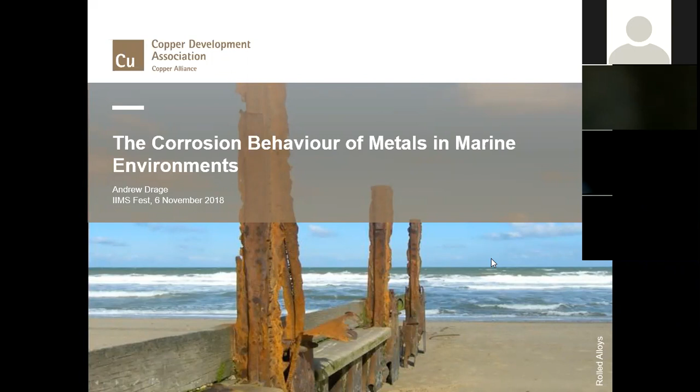It will cover many materials and corrosion properties that will hopefully be beneficial to you all. So, the corrosion behaviour of metals in seawater: marine corrosion, seawater corrosion, is down to a complex combination of properties and conditions, with different groups of materials performing in different ways dependent on circumstances and environment.

Understanding the differences in seawater itself is a good starting point, as seawater is not just a body of water containing salt. It's a complex mixture, a living body that can change at different locations. It contains different salts, dissolved gases, trace elements, suspended solids, and decomposed organic matter, together with living organisms, both large and small. Sometimes it's more the small ones that cause us an issue in terms of corrosion.

Critically, the sea actually moves with great force, and the current or flow of the seawater can change dramatically, and this can have a large effect on corrosion. It's not limited to natural movement and swells, and can also include the flow of water over the hull of a boat or a propeller, or even the flow of water inside a pipe or tube.

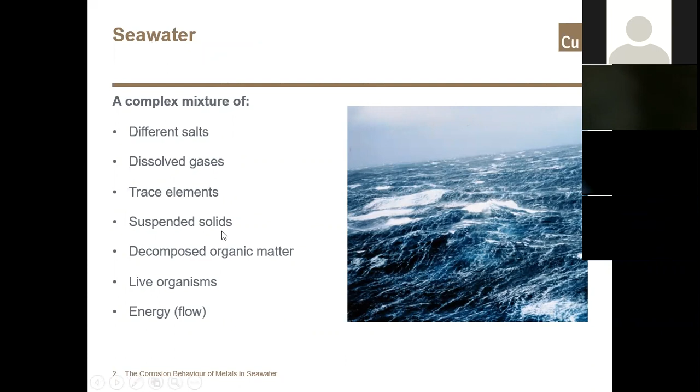Corrosion itself can be influenced by many factors within the seawater. The oxygen content can be hugely important to certain metals and alloys, as many of the metals will form oxide films on the exterior of the surface to provide superior corrosion resistance. The oxygen can be affected by water depth, seawater velocity, pollution, and marine organisms.

The flow rate of the water itself - how fast does it flow? Is it stagnant? Stagnant and polluted waters will have less oxygen content. So can you see any effect? This could be a combination of factors.

The salt content in the water can widely vary between locations. For example, dissolved salt in the Baltic Sea is only around 7 grams per kilo, whereas salt content in the Persian Gulf is 43 grams per kilo. So there's obviously a huge variation between locations.

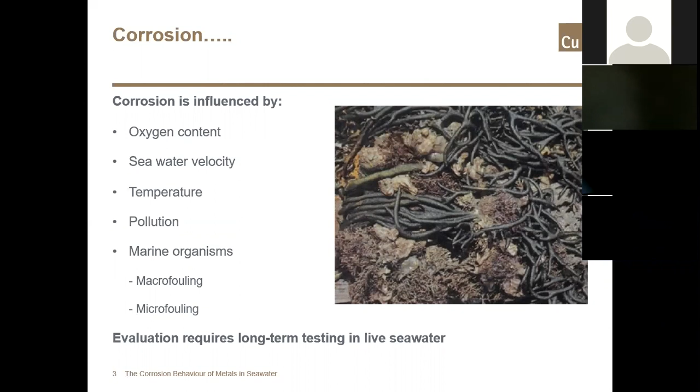This brief overview will describe the relative corrosion resistances of several different alloy groups used in seawater systems, with the main properties being covered being resistance to flow, resistance to velocity, localized corrosion, stress corrosion cracking, galvanic behaviour, and marine organism attachment. We'll touch on these again later, but these are the main mechanisms of corrosion that need to be considered. Some alloys are more susceptible to one form of corrosion than others, but they need to be taken into consideration as a whole.

If not, it may be the case that you inadvertently have a failure, because marine structures and engineering components are generally made up of more than one material. So we have to take into account each and every corrosion mechanism, and we'll briefly touch on each one as we go through the presentation.

So where do we start? Basically, we'll start by going through some of the alloy groups, and we'll start with carbon steel and cast irons, as these are probably the most commonly used structural and engineering grades within marine environments.

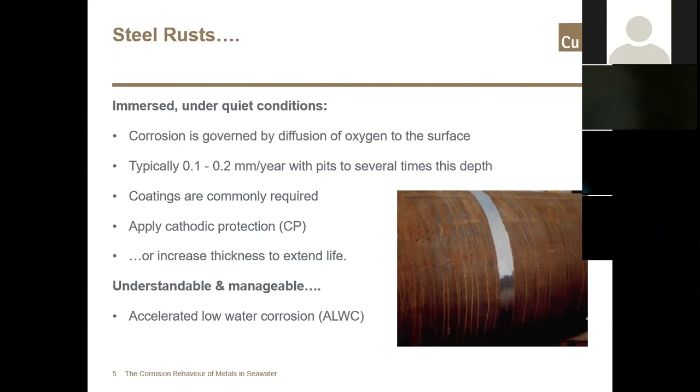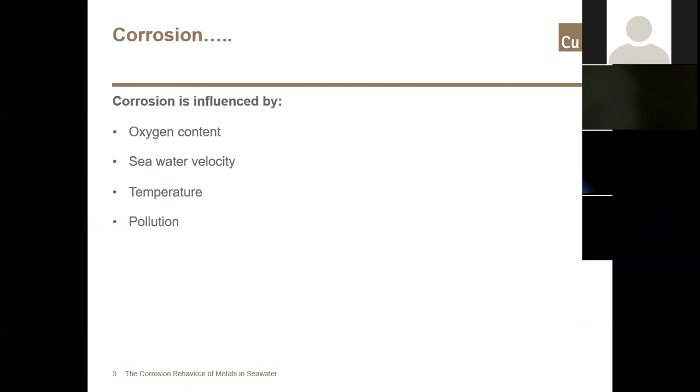The next group of alloys would be the cast irons. Now, the cast irons have a similar corrosion rate to steel when talking about grey cast irons and spheroidal graphite irons.

The traditional cast irons have a graphite flake that sits in an iron matrix, and while the graphite is a more noble material and doesn't corrode in seawater, the iron matrix is very susceptible to corrosion. So the iron can be corroded, leaving behind a deposit of graphite and silica and iron corrosion products. This is a phenomenon known as graphitization.

Generally, this type of corrosion is favoured by hot conditions and is often found in water boxes and valves in seawater systems. At first glance, the surface may appear reasonably normal, just covered in rust, but underneath is a rather flaky, crumbly structure with a serious loss of material.

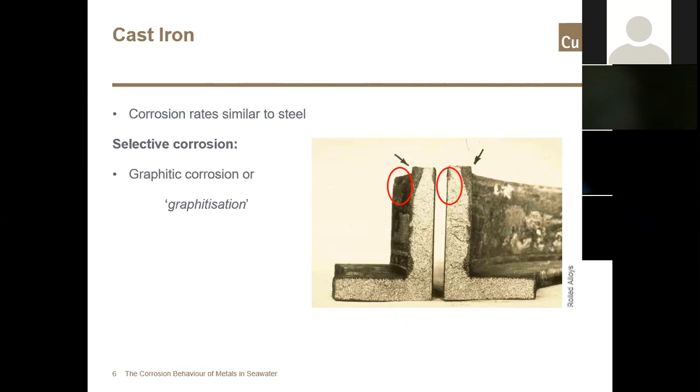They may have higher maintenance and replacement costs associated with them, but not if successful protective measures are used, such as cathodic protection or a coating. So they do have a place in marine environments due to the economics, and as mentioned in the steel section, if it's over-engineered, there can be no issue even if there is some corrosion on the surface.

Just to go on from the selective phase attack from the cast iron side of things, it's not a phenomenon limited to cast irons. On screen you can see a valve stem made from 60-40 brass that has shown signs of dezincification. The material was specified incorrectly and has failed in operation, due to the zinc phase corroding preferentially, as it wasn't as noble as the copper.

However, if you were selecting a copper alloy for seawater use, a corrosion or dezincification inhibitor would be selected, or again we could look at galvanic corrosion and make allowances that way.

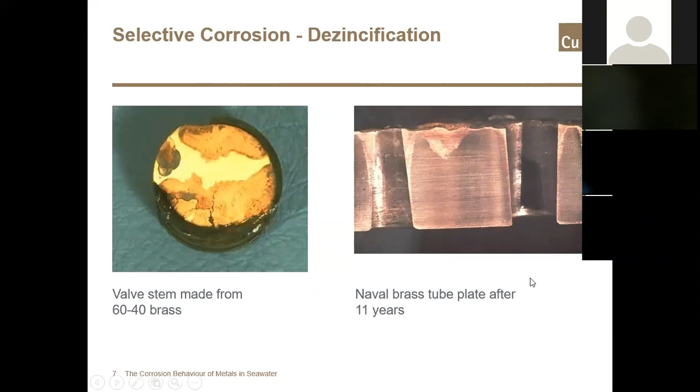The image on the right shows a naval brass tube plate that's been in service for 11 years. This was specifically over-engineered, and you can see actual corrosion on the surface of the material, but because it was over-engineered there's been no problem with that particular component, and it was designed correctly. So it's just understanding the corrosion method that could occur, and making sure we select materials correctly and proper design procedures to allow for corrosion over time.

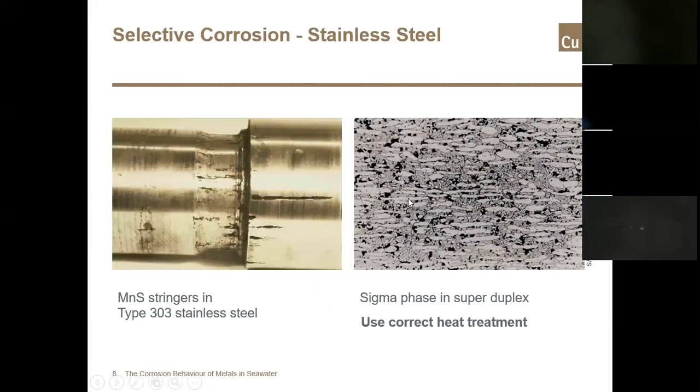Going back to the cast irons, there have been a number of developments over the past 70 or 80 years, with other cast irons coming into effect where additions of more noble elements have been made. For example, an alloy known as Ni-resist has additions of 15 to 25% nickel and small additions of chromium and silicon. As the nickel content increases, the iron becomes more austenitic, hence the name austenitic cast irons, and it actually reduces the corrosion rates compared to traditional grey cast irons or spheroidal cast irons.

In fact, corrosion rates can be as low as 0.02 millimeters per year on this particular alloy, but again the corrosion rates do increase with the flow rate and velocity of the seawater. And the alloys are often utilised more for larger workhorse jobs.

They utilise the strengths. They're typically used for pumps and pump casings, and they can be used in copper and ferrous seawater systems reasonably satisfactorily. However, they can be susceptible to stress corrosion cracking as well. So whilst there are some improvements, there are other issues that again need to be taken into account during the material selection and design process.

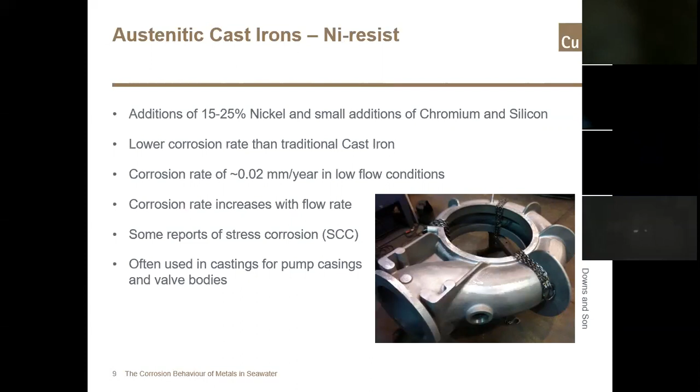So we lead ourselves onto stainless steels, and these were developed around 90 years ago, and they were developed to offer better corrosion resistance to carbon steels and cast irons. A stainless, by definition, is an iron alloy with more than 10.5% chromium, and these obtain their corrosion resistance from the formation of a protective chromium oxide film that forms on exposure to air.

Where you can see the carbon steel on the left-hand side, when that is exposed to air, it begins to rust, and it gets a protective coating of rust that stabilizes the surface. Stainless steel gets a strong adhesive-like film on the surface that's approximately 2 to 3 nanometers thick, and this replenishes itself with oxygen if it is damaged. So it can repair itself, and in open seawater there's normally enough oxygen present to allow this film to repair and heal itself, protecting the underlying metal from any corrosion.

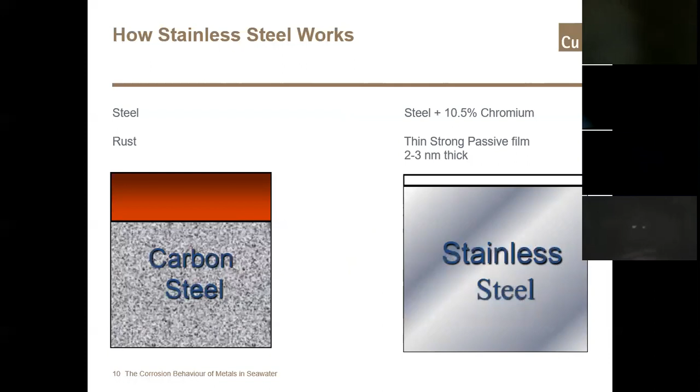Stainless steels generally rely on the movement of seawater across the surface to prevent deposits and marine growth from forming, and it discourages local pitting. If the water is flowing, generally a velocity of around 1 meter per second is needed to prevent any pitting corrosion in seawater.

The general corrosion rate of stainless steel is very low, around 0.002 millimeters per year. But this is achieved by ensuring that oxygen is available through the flow of seawater across the stainless steel surface, which helps maintain the protective film, and the material remains passive and immune from major material loss and corrosion.

The film is actually maintained at higher velocities above 1 meter per second, and can even go as high as around 40 meters per second, which, if you remember going back to cast irons and carbon steels, could show losses of 5 millimeters per year on that particular material. So it's a big step up, and a big improvement.

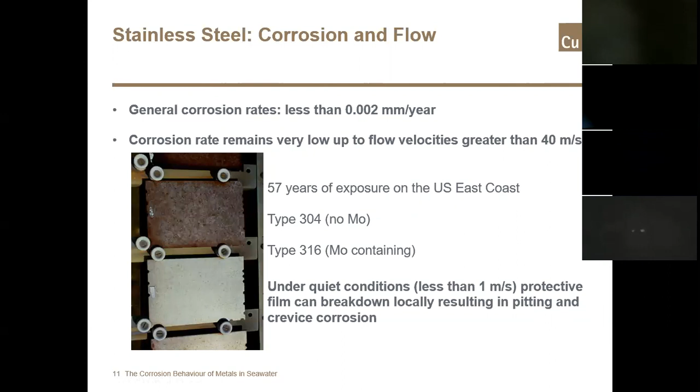Stainless can actually be susceptible to pitting, and it can be found in open or exposed areas of metal, possibly under microfouling, or it could be that chloride levels are too high, or there's overchlorination, surface contamination, or surface inclusions being exposed.

The problem of using stainless steels in seawater can often be the problem of pitting, and this can also be exposed by pitting attack under low velocity conditions, and in crevices and joins of material where the oxygen can't get to replace the protective film.

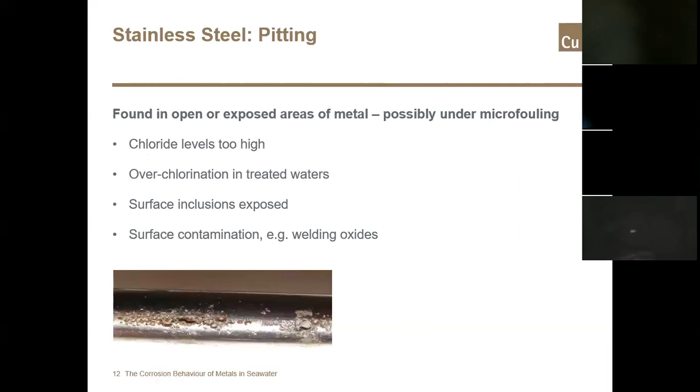Crevices or under-deposit corrosion can also be an issue where the oxygen becomes locally depleted. An electrochemical cell is created where the film may have broken down, exposing the metal below, which then becomes anodic compared to the adjacent material, and the steel will then corrode.

Crevice corrosion occurs more readily than pitting in seawater and at lower temperatures. So higher levels of the same alloying additions are used to improve resistance to crevice corrosion as well as pitting. Molybdenum, nickel and chromium all add to the corrosion resistance.

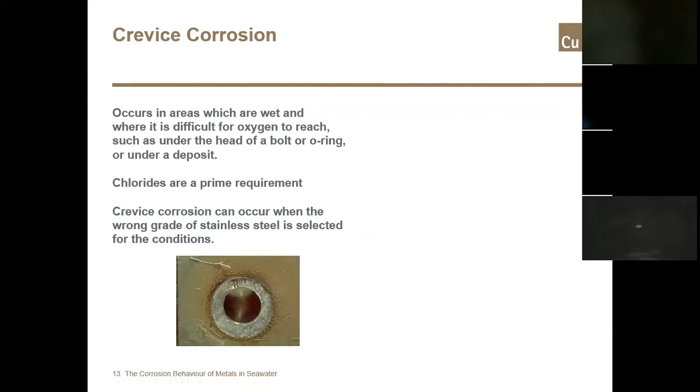You can see from the image on screen that it's an area that's been sealed by an O-ring or a nut in a confined area and suffered crevice corrosion. Or we have an image here where 316 has been used for a coupling, and where the O-ring is sat, there's been some crevice corrosion occur. This issue was cured by replacing the 316 with a 6% moly stainless steel, which then removed the tendency for crevice corrosion.

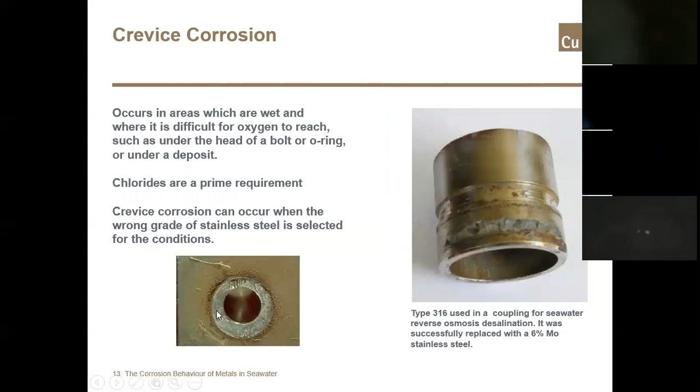Again, if we go back to the previous image, this is where the nut sat in the component, and you can see around the nut before it was removed that there is some rust. Then from that rust, when the nut is removed, you can see the crevice corrosion underneath the surface, and also on the parent material itself.

So we can look at removing the issue of crevice corrosion by using good practice. It's always good to design components avoiding threaded connections, avoiding sealing tight crevices with welds, and making full penetration pipe welds.

Alternatively, local improvements to crevice corrosion resistance can be achieved in areas such as flange faces by weld overlaying. This weld overlaying would be done with more resistant high nickel alloys that would offer better crevice corrosion resistance.

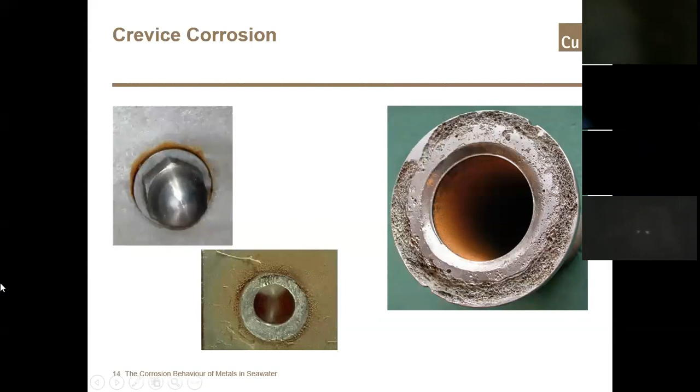The crevice corrosion and pitting resistance is generally ranked on how susceptible they are, and it's generally accepted now that a pitting resistance equivalent number greater than 40 is required for high resistance to localized corrosion in ambient temperature seawater.

Obviously the formula there is for the calculation of this. Alloys with a pitting resistance equivalent number of less than 40 often require cathodic protection still, and are sometimes galvanically protected by other metals within the system to stop any crevice corrosion and pitting occurring.

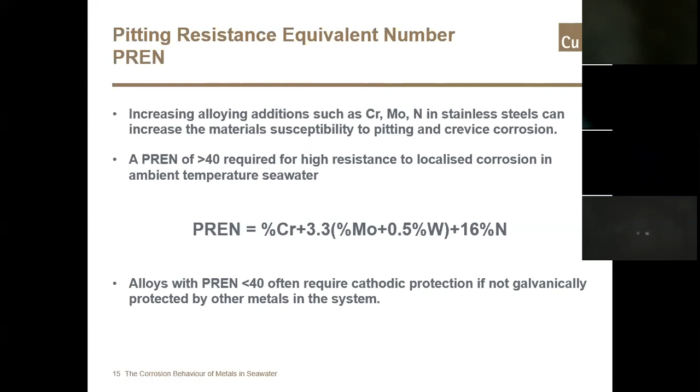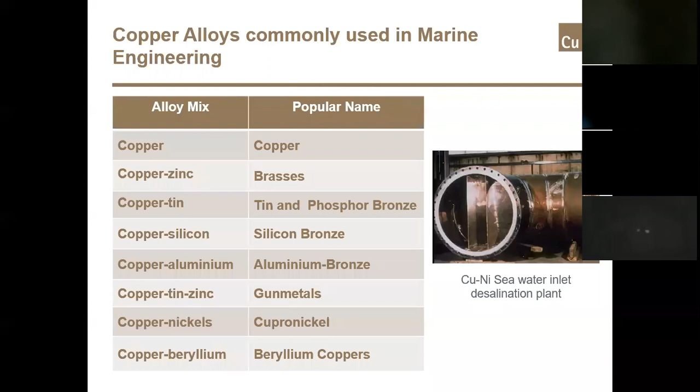So it brings me now to the copper alloys, which is obviously more at home to myself, something that we deal with on a daily basis. The most common coppers used in marine engineering are coppers, aluminium bronzes, and copper nickels. These have relatively simple additions to the copper matrix: copper zinc makes a brass, copper tin makes a phosphor bronze, copper aluminium makes an aluminium bronze, and a nickel addition makes a copper nickel. So they are reasonably straightforward, but there are a lot of different groups with different benefits.

We need to look at some of these in more detail. The benefits of copper alloys were recognised many years ago, back as far as the 17th century, when the benefits of copper sheathing were recognised on ship hulls, keeping them clean and enabling better manoeuvrability. Also gunmetals, i.e. tin bronzes, were used for cannon bodies on ships in olden times. The copper alloys have actually been developed massively since those early days, with many groups of materials and properties being developed. Again, this is a topic in itself, so I'll just touch the surface.

The development of copper-based alloys has allowed a wide range of properties to be met, with strength levels available up to 1500 MPa, hardness values up to 45 HRC. The copper alloys can more than match strength levels associated with ferrous materials, such as stainless steels, nickel alloys, and high strength steels. Copper as a whole offers low general corrosion rates in static seawater, approximately 0.02 millimeters per year, and has little tendency to pit.

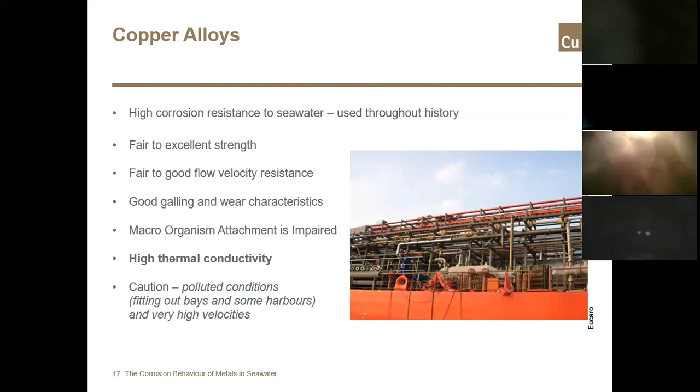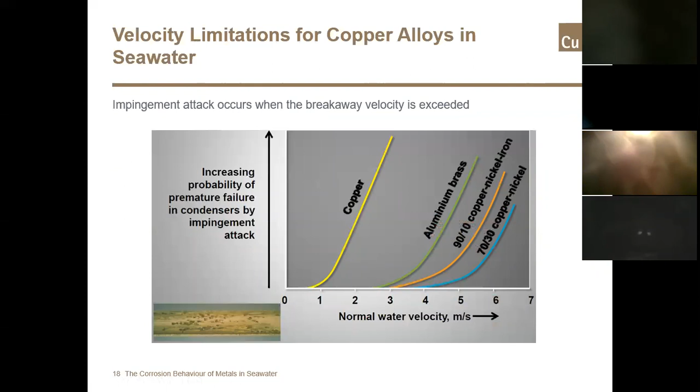As you can see from the graphic here, the flow rate does have an influence on which copper-based material should be selected, and whether that material is then subjected to impingement attack, and at what velocity. The typical materials for pipes and tubes are either aluminium brass or copper nickels, and as you can see here, there are recommended guidelines for maximum flow per second, but this is for continual use rather than intermittent use, so it can actually increase in certain instances. But we should avoid tight bends and localized obstructions, to avoid any turbulence and issues with crevice corrosion, etc.

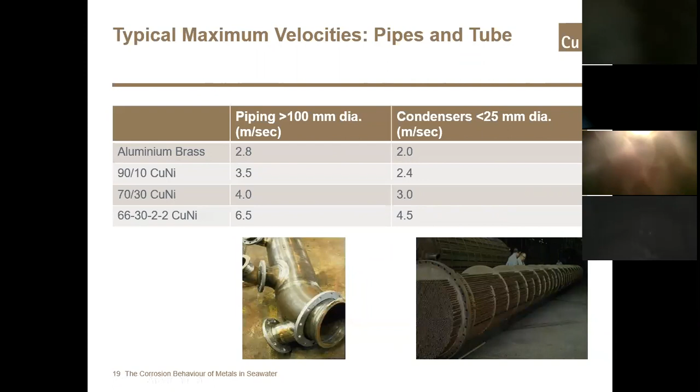So both the 90-10 and 70-30 cupro nickels are successfully used for various seawater pipe work, in seawater condensers, heat exchangers, and pipe work in naval vessels and merchant shipping. Other areas, like copper nickels, can be used in fire water systems, and as I say, intermittent use can allow for up to 10 to 15 meters per second in that particular application, and it can be successfully used.

For boat hulls, if you were sheathing a boat hull, then you can look at 12 to 19 meters per second. Or if you were looking for a nickel aluminium bronze, we could use this for a propeller, because they've got a high resistance to velocity, and they will generally be used for their high resistance to cavitation and impingement attack.

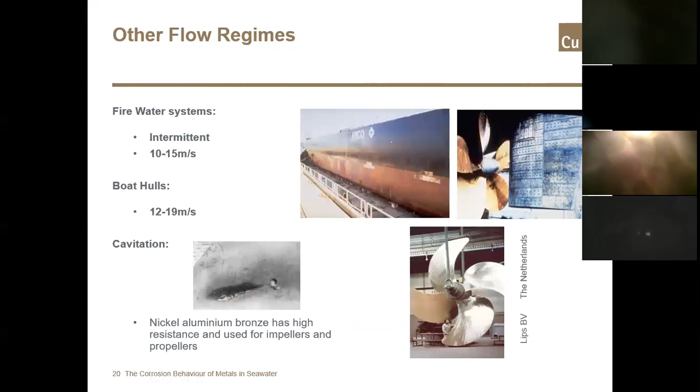The next group of alloys that we'll look at is high nickel alloys. A couple of these include the nickel coppers, alloy 400 and K500. They show low general corrosion rates overall, and this can be maintained at higher flow rates. The alloy 400 is approximately 2/3 nickel, 1/3 copper. The K500 is similar, but has additions of aluminium and titanium, which when heat treated and precipitation hardened, improve strength levels to nearly double that of alloy 400, but retain the same corrosion resistance levels.

They behave very similar to 316 stainless steel, in that they have low corrosion rates at high flow rates. However, they can pit and crevice corrode in quiet conditions, and when they do, the pits tend to be flat and broad, rather than the undercutting pitting typical of stainless steels.

Cathodic protection can be used when in contact with less noble metals, and this would enhance the performance of these alloys. But at velocities greater than 1 meter per second, same as the stainless steels, the surface would remain passive and offer a good resistance to corrosion. But you would need to be aware of materials in the same alloy system, as the nickel coppers are less noble than the nickel chromium molybdenum alloys and high alloy steels. So if they were coupled with these, then there could be issues.

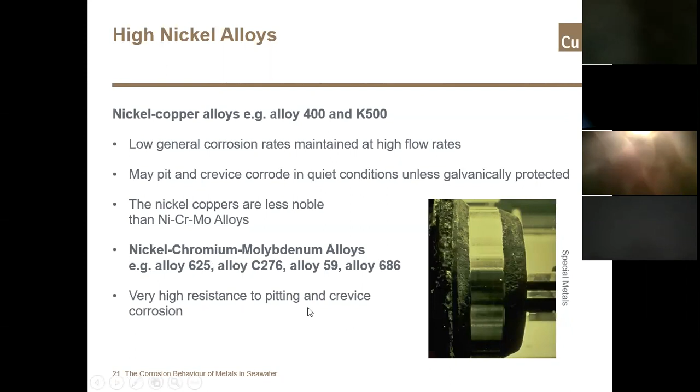The other significant group of nickel alloys, as just mentioned, was the nickel chromium molybdenum alloys. These offer a very high resistance to corrosion, and in particular pitting and crevice corrosion. They've got a high corrosion resistance in both low and high flowing conditions, and can be used for critical items. However, they are expensive alloys due to the amount of nickel and also the alloying elements. Their use is generally restricted to critical applications.

These include alloys such as alloy 625 and C276, C22, and alloy 686. They provide a corrosion resistant material, but again, it comes down to economics and where the material's situated.

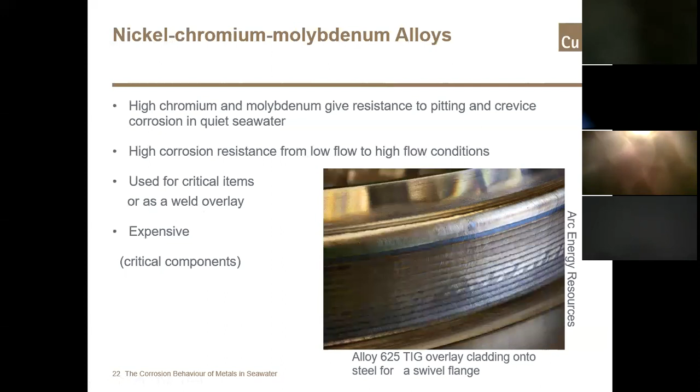The aluminium alloys, generally the 5000 series are preferred for seawater use, with a few of the 6000 series. The 6000 series offers higher strengths to the 5000 series. Now, the aluminium does actually offer a very low corrosion rate of less than 0.005 millimeters per year.

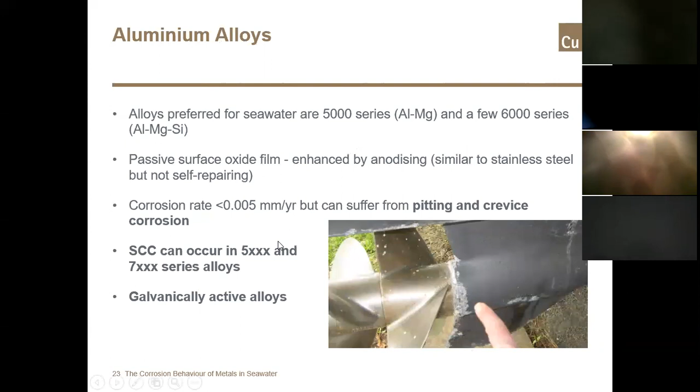But it is a galvanically active alloy, so if you are using it as a main alloy, then you have to ensure that the galvanic protection is in place, so that it doesn't become the sacrificial anode, because the passive film that protects the aluminium is not self-repairing. It can be enhanced by anodizing and coating, but it can cause issues if it does get damaged.

And the last group of materials would be the titaniums. The titaniums are essentially immune to seawater corrosion and crevice corrosion below 75 degrees C, and in flow rates of less than 36 meters per second. Again, they're protected by titanium oxide on the external surface of the material. Any corrosion rates in static and reasonably flowing seawater are quite negligible.

Interestingly, the titanium grades are also unaffected by chlorides, sulfides and chlorination. So even though they are quite a lot more expensive than other alternatives, their use becomes justifiable for more severe critical applications.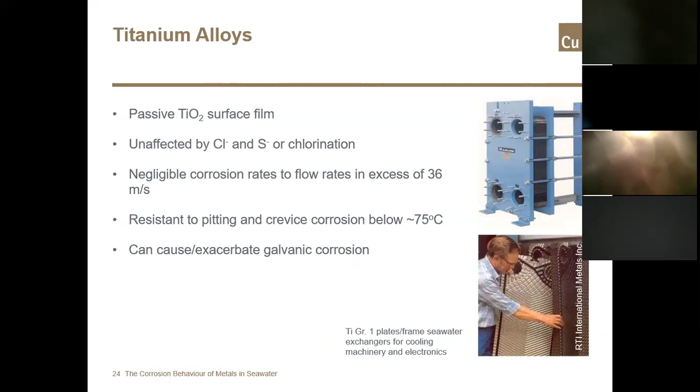But issues can occur where material loss from other alloys, because the titanium is so noble, you need to galvanically protect the materials that are in the system. Otherwise, the titanium would cause the other materials to corrode quite rapidly. So again, it's a balancing act between what is suitable for a particular application, what is coupled to, and where it's situated.

So we can actually recap on the flow behaviour of the materials and how they perform under different flow rates. And as you can see, the carbon steels, cast irons offer quite significant corrosion rates under even low flow rates.

The copper-based alloys offer a significantly lower rate of corrosion under reasonable flow rates, but when you get down to the higher flow rates, then this can cause problems with them. The 316 and the stainless steels, the nickel coppers, their corrosion resistance systems rely on oxygen being fed to them, so they actually enjoy the higher flow rate. And the nickel, chromium, molybdenum, and the super stainlesses, titaniums, etc., again, don't have any real effect of increasing flow behaviour.

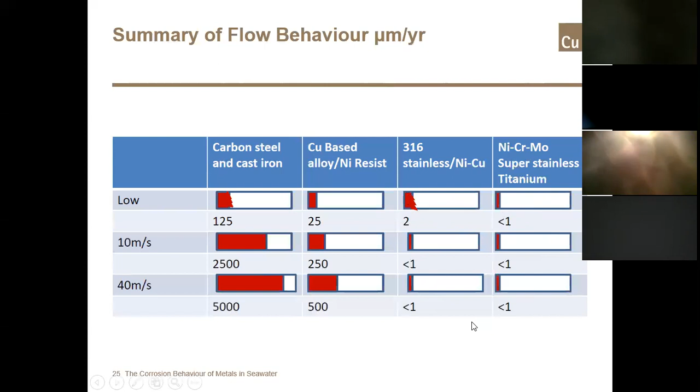The stress corrosion cracking is another issue that we've touched upon but not really gone into any depth on. Now, for stress corrosion cracking to occur, you need to have a susceptible alloy and a combination of a tensile stress and corrosive environment.

So, for example, stainless steels can stress corrosion crack in the presence of chloride at greater than 50 degrees C, or in the case of copper-based alloys, in the presence of ammonia. Failures due to stress corrosion cracking can be very unpredictable, and virtually all alloy systems can be susceptible under specific conditions. So it is something to be aware of and something to look at.

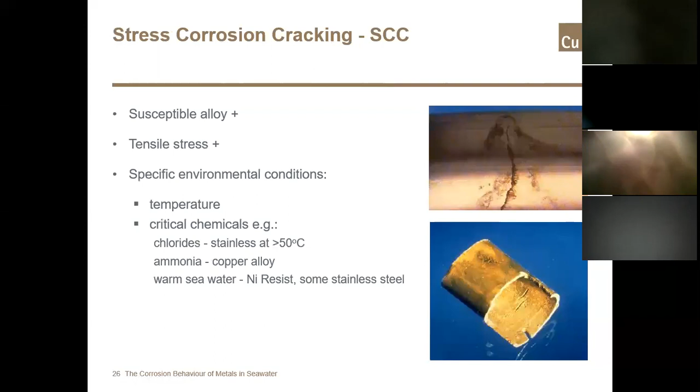The last corrosion mechanism that needs to be mentioned in more detail is galvanic corrosion. This occurs when two or more metals are immersed in seawater. The seawater acts as an electrolyte, and a current flows between the two. The more noble metal will act as a cathode and have a lower corrosion rate than it normally would, while the less noble material would be the anode and would actually corrode more than it normally would.

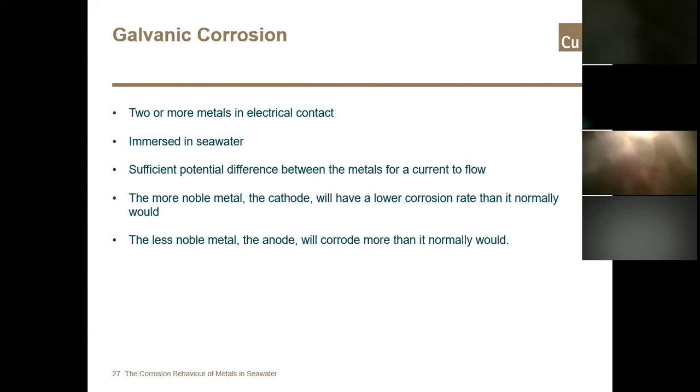There is a Galvanic series that's readily available for seeing which metals can be safely coupled with others, and generally, if they have a similar electrode potential and the surface areas don't differ too much, then they will be reasonably compatible.

But the further apart the materials are on this scale, the higher the rates of corrosion on the anodic material. So you can see that magnesium, zinc and aluminium on the table are all active galvanically and would be susceptible to corrosion if they were coupled with something at the more noble end of the scale, such as a bronze, a nickel alloy, or titanium. So in that instance, galvanic protection would be necessary.

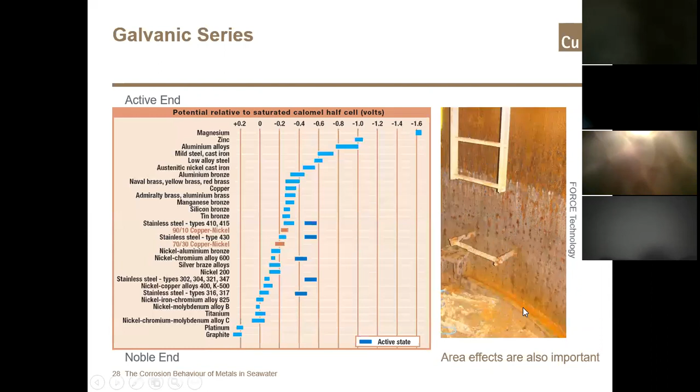Otherwise, you obtain situations like this, where an aluminium ladder has corroded inside a steel casing, and obviously where the water rises and falls, there's been quite accelerated corrosion of the aluminium ladder.

Another example would be the galvanic corrosion of a duplex stainless steel flange. A graphite gasket was placed in between the flange, and as you can see from the white area, galvanic corrosion has occurred with quite significant metal loss. So even something that is apparently quite noble, like duplex stainless, if coupled with far more noble graphite gasket, then we would get issues.

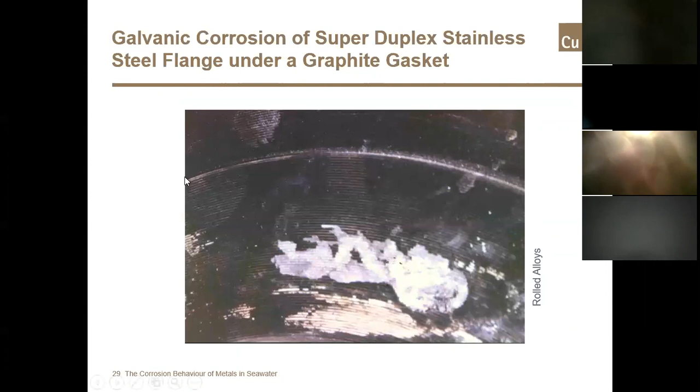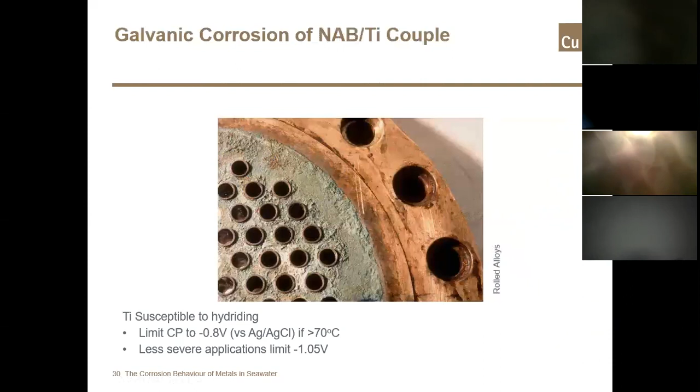Another example is the galvanic corrosion of nickel aluminium bronze, where you've got a titanium tube. The nickel aluminium bronze tube plate has corroded with accelerated corrosion, due to titanium tubes being much more noble than the nickel aluminium bronze, and the design of it all being wrong. So it just needs somebody to understand the system and try to design that out of any future work.

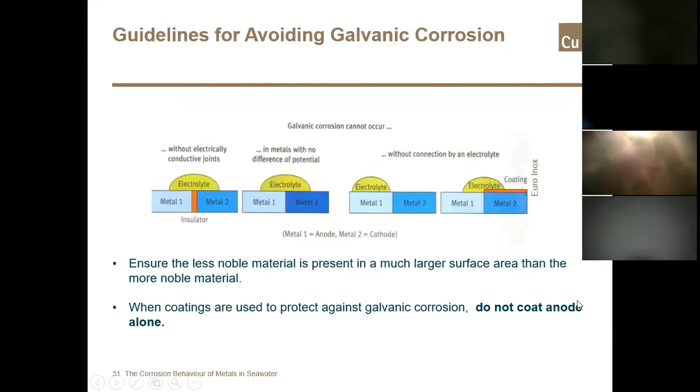But the rule is that you do not coat just the anode alone. So I've tried to cover it. I know I'm running significantly late, so I do apologise.

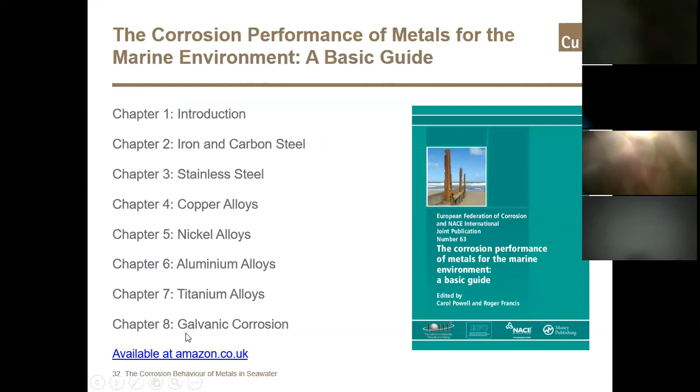There is a very good book that's available from Amazon. It's got no relation to myself, but I have used this for research myself. It's the Corrosion Performance of Metals for Marine Environments. It's very reasonable and very informative. So if you want any more information on such a large topic, this is a good starting point.